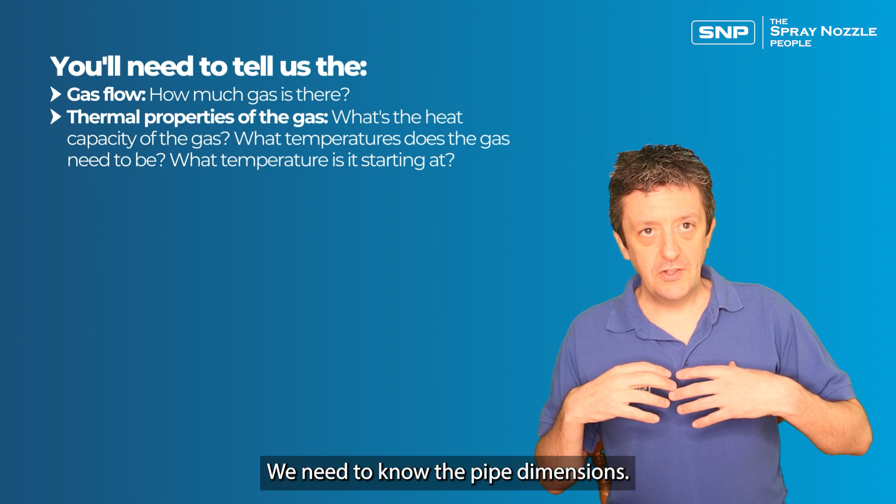We need to know the pipe dimensions. This will help us work out the speed of the gas. If we know the flow rate of the gas and we know the pipe dimensions, then we can work out the velocity of that gas. This will also help us work out where we stick our nozzles and how we can get coverage across that.

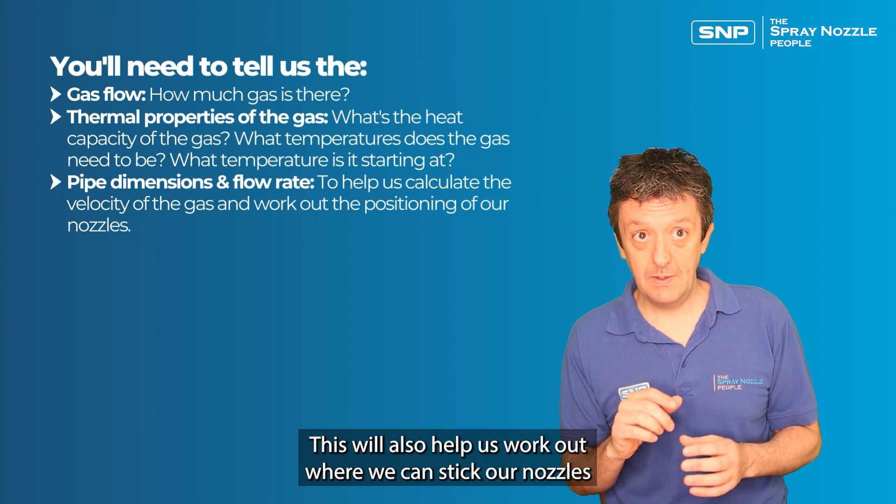We want to know whether air atomizing is acceptable. If we are able to add air into the system, if that's acceptable, that gives us a whole range of different options to look at. We can look at air atomizing nozzles. If it's completely not possible to do that, then obviously we can rule those out straight away.

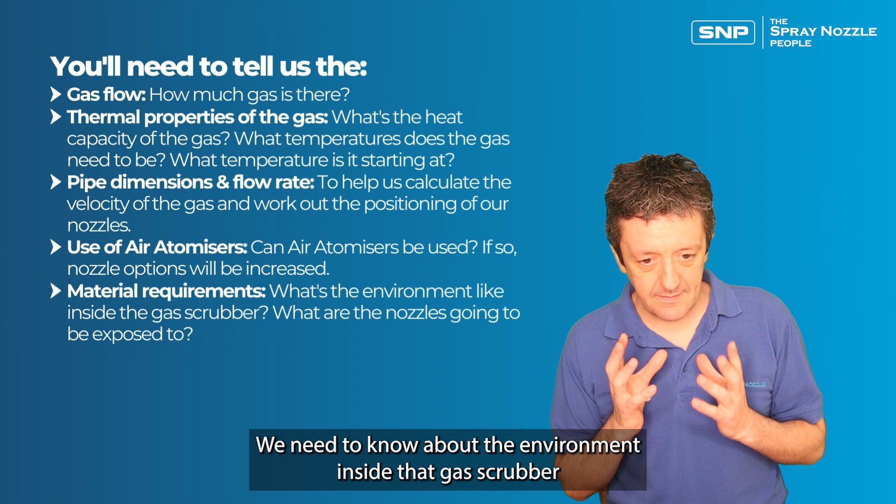The material requirements. We need to know about the environment inside that gas scrubber, what the nozzles are going to be exposed to. Now, we manufacture nozzles in a huge variety of different materials, but we need some guidance on which materials are going to be acceptable for your environment.

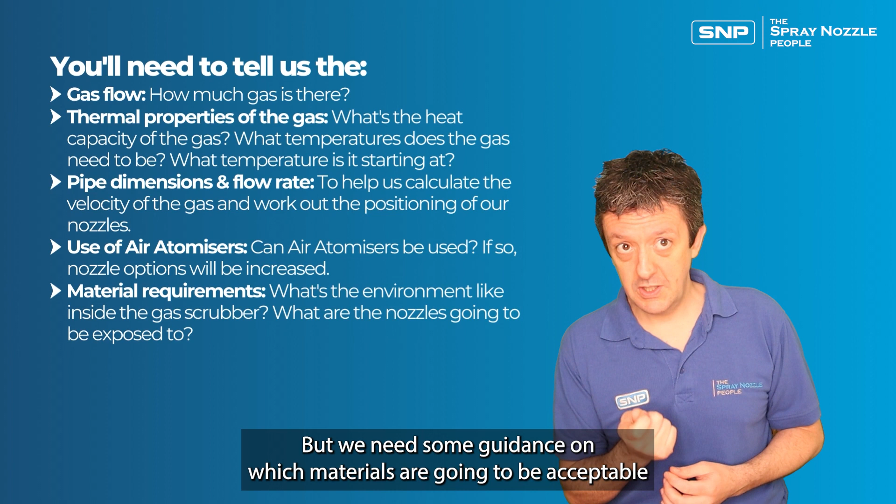Some potential insertion points for the nozzle. So where can we stick our nozzles? And that will help us design any lances or spray bars or spray rings that we need to put in there to get the nozzles in the right position.

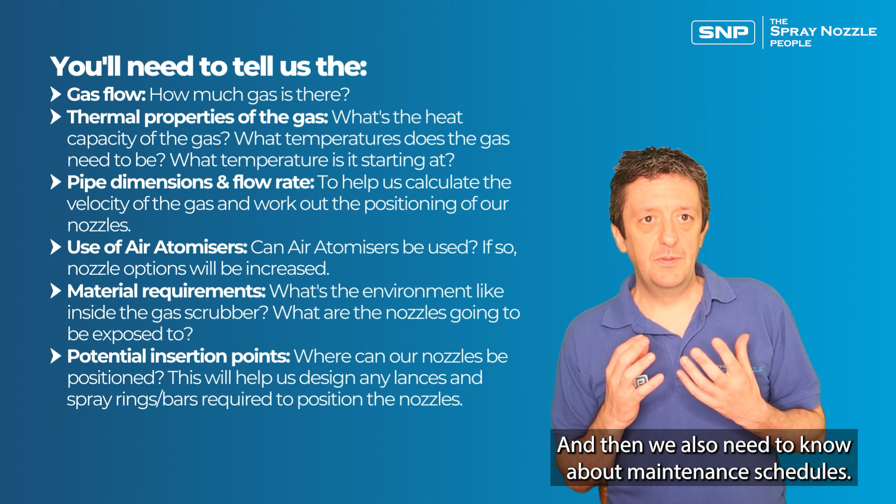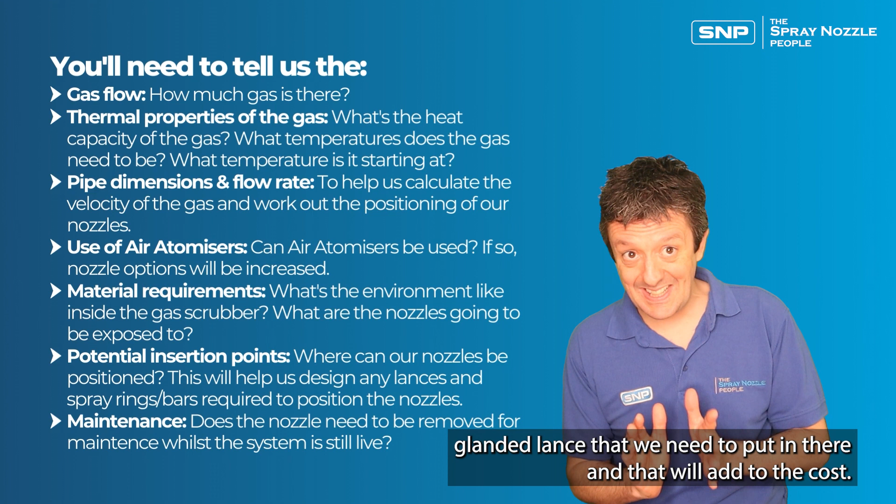And then we also need to know about maintenance schedules. For example, does the nozzle need to be removed for maintenance whilst the system is still live? If that's the case, we need to think about what type of retractable kind of glanded lance that we need to put in there, and that can add to the cost. If the nozzles will only be maintained whilst the system is shut down, then basic simple lances will suffice.

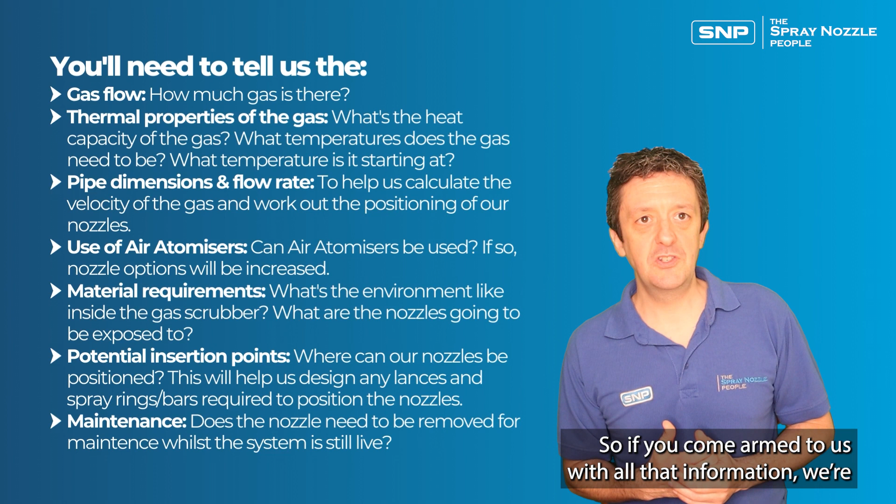So if you come to us with all of that information, we're starting off in a good place, and we can hopefully very rapidly spec in your nozzles for your gas conditioning, gas scrubbing application.